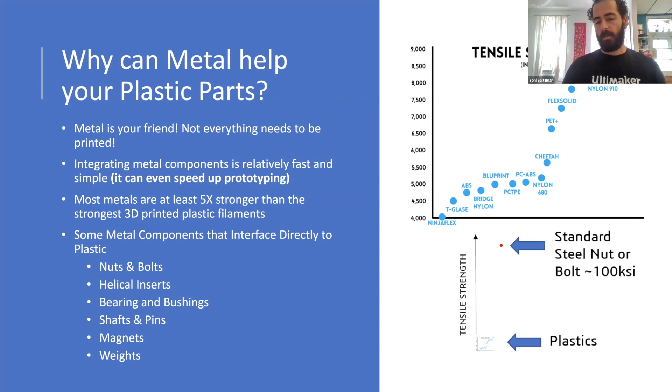Why metal? Well, it's so much stronger. Here I've plotted a bunch of different plastic parts, and below that I took that same plot, made it really small, and scaled it to add a standard steel nut. So steel is about 10 times stronger in most cases than plastic.

So how do we connect parts together? Well, you don't need metal. You can tap directly into a plastic part, but it's not often the best. And what if you don't want to tap? Tapping is sometimes challenging. You could use a push-in insert, which is really quick and easy. Or if you want to go that next step, you could use a helical insert. Boss nuts, where you create a boss and put a nut in, is super easy too, and that's also very strong.

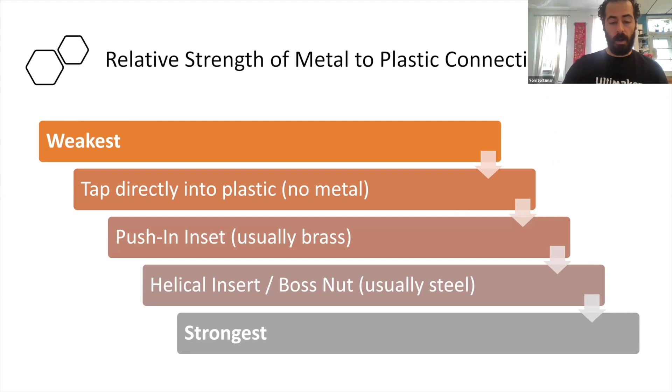So let's say you want to tap. How would you do that? You print your part and you could get a tapping machine, which is very helpful. At Honeybee Robotics we use a little tap stand all the time, it's very quick and easy. Buy some taps, they're really cheap. That tap stand, you can integrate a chuck, and tap directly into your plastic part. You don't even need metal.

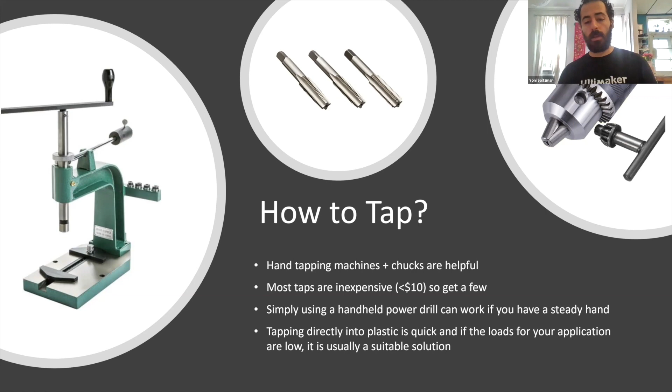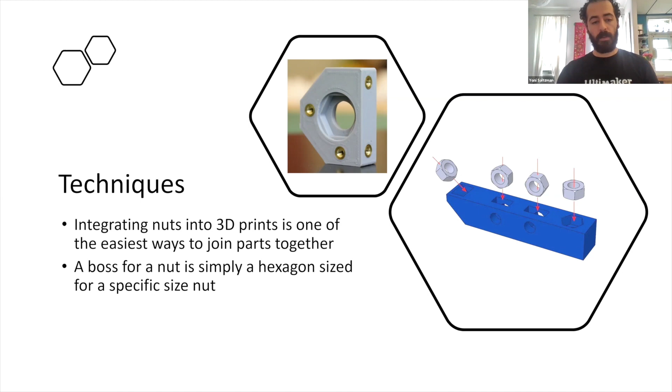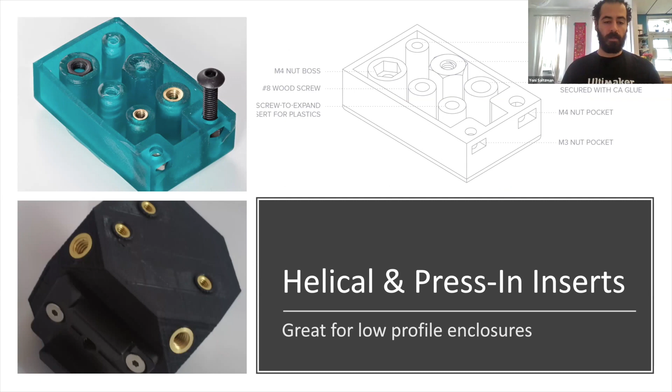So bosses for your nuts are really, really easy to do. I use them all the time for prototyping. Now, press-in inserts and helical inserts are great too. The press-in inserts are usually brass, so they're not going to be as strong as steel, like most nuts are made out of steel, but the press-in inserts are quite easy, cheap, and fast. You can put them in on an angled surface like you see in the lower left.

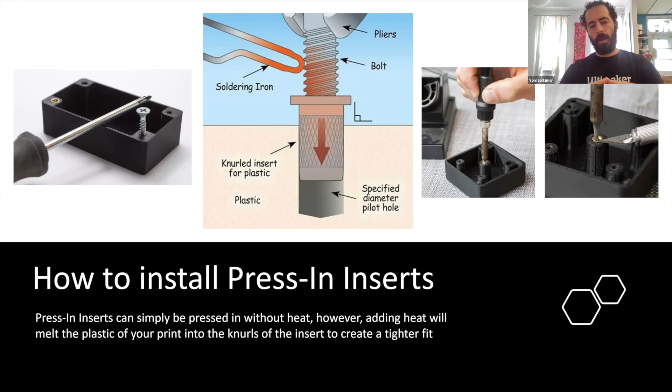So what about helical inserts? Most people don't use these, but they're great. They're very strong - you can get these inserts in all different types of materials, very strong stainless steels. I use these all the time. You can thread them right into your parts. They're very easy.

My favorite brand is HeliCoil. They're also pretty cheap, but all different brands are out there. You can get these inserts from a bunch of different websites, like McMaster or Amazon.

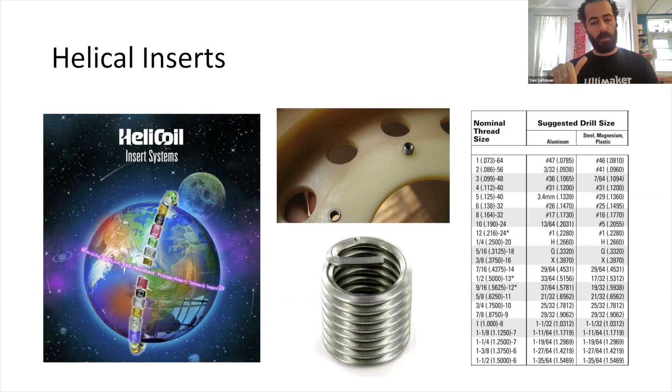You can drill it out and put the helicoil in. So it's really simple. How do you install it? Number one, you drill. When you print a hole with an Ultimaker or any 3D printer, it's usually not exactly circular, so it's often good to drill it out. Then you check that your tap is the right size, then you tap it, then you insert your helical insert, or helicoil, which is a brand name. You can remove the tang at the bottom if you want, but you don't have to. They're great, and I'd recommend them.

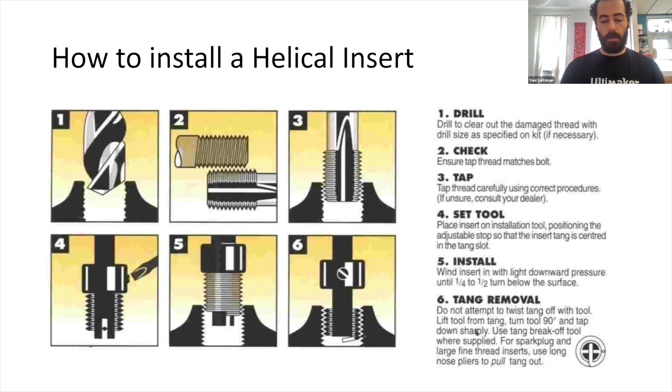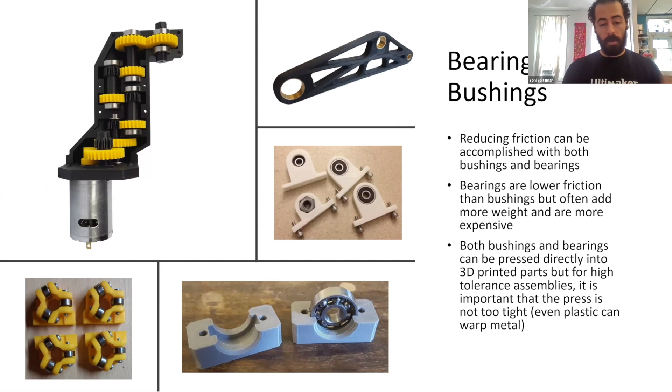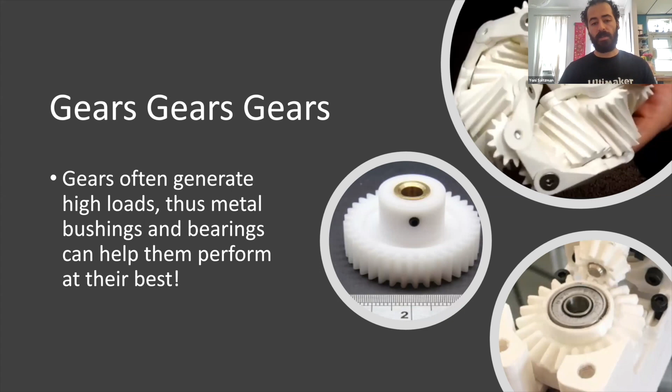What are other metal parts you can integrate into your plastic parts? Bushings and bearings are really useful for low friction. Both reduce friction, but bearings reduce it more because of the spherical rolling elements inside. Here are some examples in a gearbox showing different ways to integrate bearings. Gears are a really useful way to use bushings or bearings. When you have higher loads, you often want that interface to be both low friction and able to withstand the load, which is where bushings and bearings can really help.

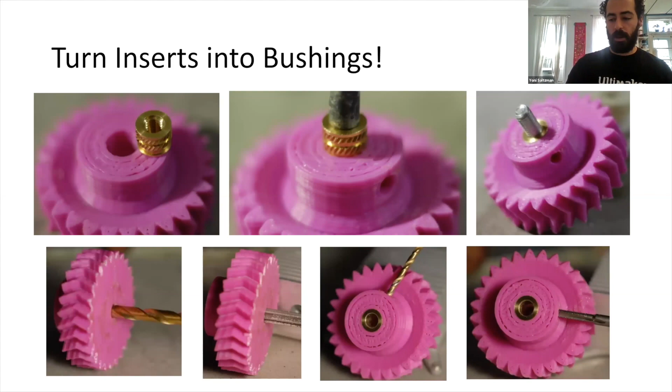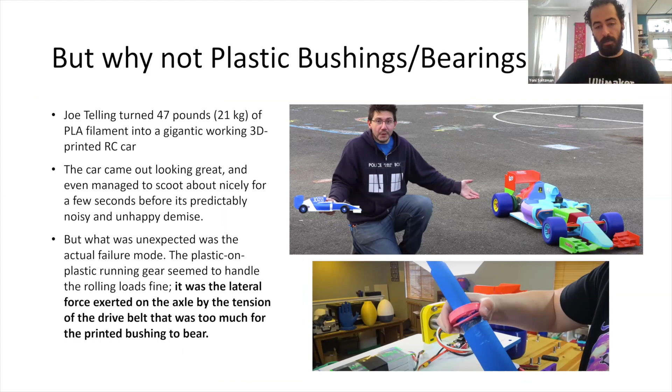So why not plastic bushings? Here's a really cool project. This guy, Joe Telling, made a huge 47-pound all-3D-printed car, except for the batteries and a few electronic devices, but he made his bushings out of plastic and it didn't work. It went for a few feet and then failed because the lateral forces exerted on the axle by the drive belt were too much. He should have used a metal bushing in that case.

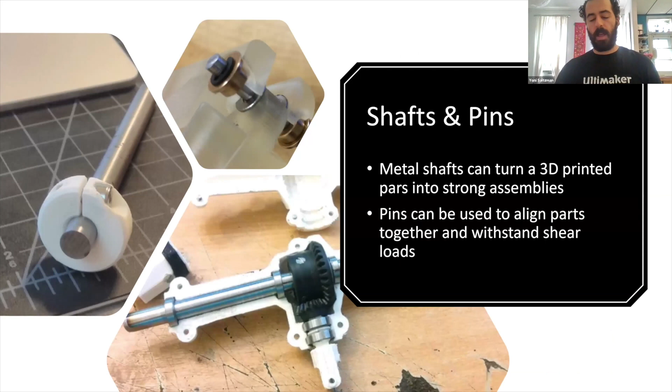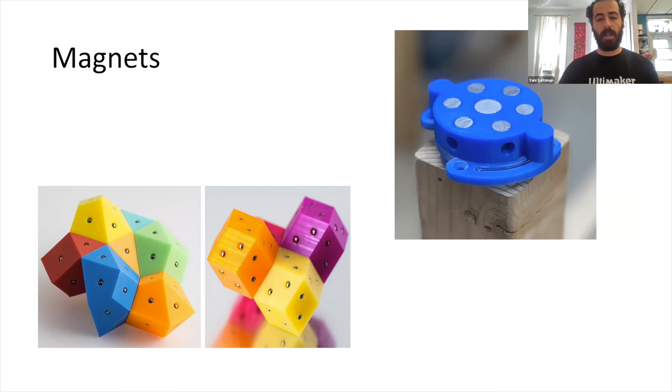Shafts and pins are another example of using metal, and this allows you to create really great gearboxes—it's just another way to go forward. Magnets are another metal part that allow you to make very intricate sculptures and can be used for actual engineering applications. You just pop a magnet in your part, press it in, or glue it in.

The best types of glue for metal to plastic are either two-part adhesives, which are most epoxies, or contact adhesives, which are usually neoprene-based. Both Gorilla Glue two-part epoxy and Loctite Stik 'N Seal Extreme Conditions for all temperatures are great options for connecting plastic parts to metal parts.

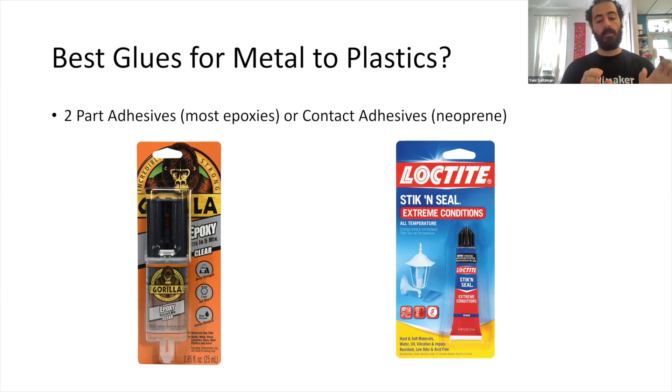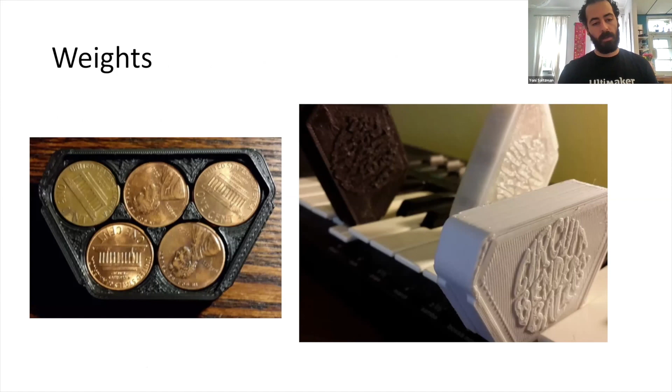You can also use metal for weights. Here somebody used pennies in a 3D printed enclosure as a weight on a piano to hold down a key—they were making experimental music. You could also use weights or other metal things for a lot of different applications.

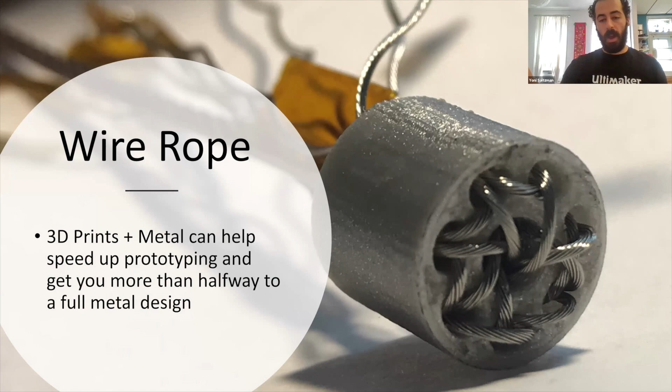Here is a project I worked on: a wire rope termination for the next lunar rover. This rover will explore for water ice on the south pole of the moon. This is a project I'm currently working on for Honeybee Robotics. With my Ultimaker, I printed this little fitting for a wire rope—another metal application—and we are prototyping this part. Lots of cool applications.

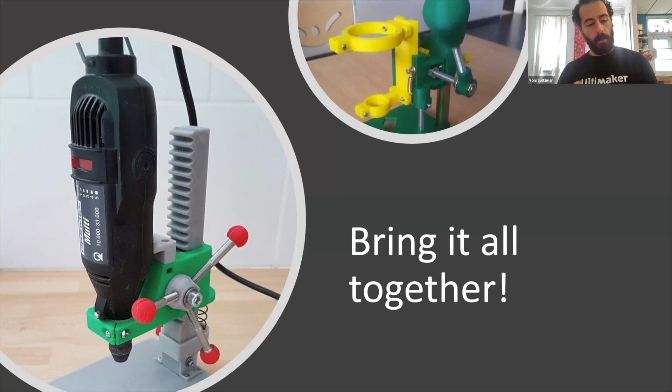Bring it all together, and you can make some really cool assemblies with these techniques I've talked about. So thank you guys very much, and I'll pass it back to Jeremy.